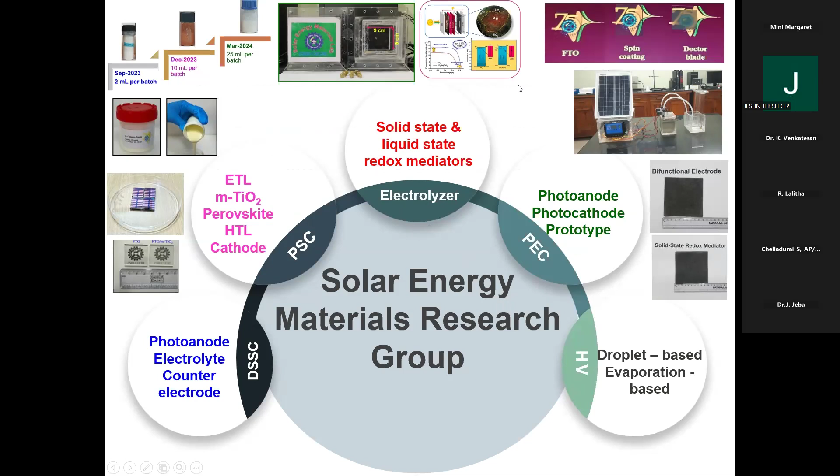In this institute, I am leading the solar energy materials research group. My group is mainly working on dye solar cells, perovskite solar cells, electrolyzers for green hydrogen production, photoelectrochemical cells, and hydrovoltaic devices. These are some of the recent developments in our research group. This is my research team; this picture was taken just in June. These are some of the distinguished alumni who completed their tenure and moved to the next position. So now let me come to the story.

So why does our government want to announce a National Green Hydrogen Mission? In 2015, there was a conference held in Paris, where the prime ministers of 195 countries participated. They seriously discussed several issues, and finally concluded that climate change mitigation is of utmost importance, because if we are unable to predict the climate, several natural disasters will happen. So they finally agreed and signed the agreement, which entered into force on 4th November 2016. This agreement covers climate change mitigation, adaptation, and financing for related activities.

Once our Prime Minister came back to India, he announced the National E-Mobility Mission, switching from fossil fuel based vehicles to e-vehicles. The e-vehicle is called a plug-in type electric vehicle. It contains a battery pack, battery management system, high voltage cables, a specially designed motor and power electronics. Just like charging your mobile phone, you can plug it in and charge it. So this is called a plug-in type electric vehicle.

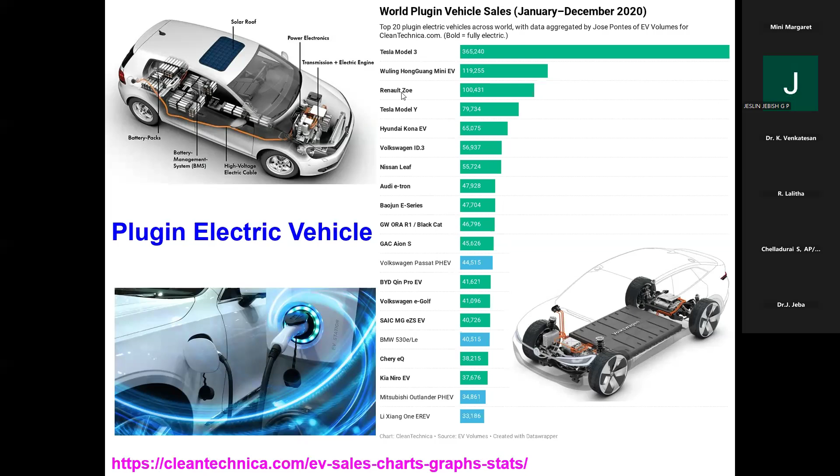Look at this survey taken between January and December 2020. Even during the pandemic period, almost 16 lakh e-vehicles were sold. E-vehicles seem to be very expensive, so alternatively, people are moving to e-scooters. In the survey taken between January and December 2021, almost 1,35,000 e-scooters were sold. So it seems both higher class and middle class people have awareness about switching from fossil fuel based mobility to e-mobility, which is a green vehicle that will not pollute the environment. That is why middle class people are also moving towards e-scooters.

The government is also setting policy for each state. They want to register at least 5 lakh e-vehicles in 5 years, and they are giving tax rebates and exemption from interest if you get a bank loan. Likewise, they are announcing several attractive schemes, since the government believes the e-vehicle is a green vehicle. But in reality, the e-vehicle is charged at a charging station, and that charge is generated from a diesel generator. So it indirectly pollutes the environment. Then how can we make a perfect mobility? That is the key question.

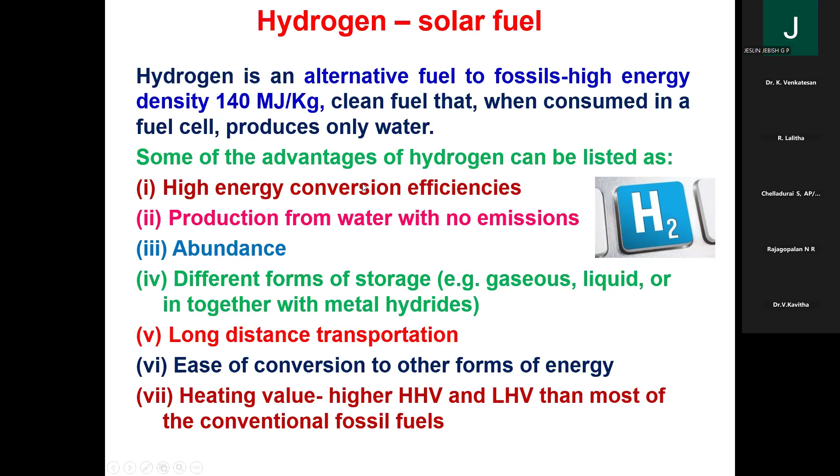Now let me explain the color code for hydrogen, because based on the production method, hydrogen has different color codes. Normally we can use renewable energy source for producing hydrogen, this is one source. Or nuclear energy, another source. Then natural gas, another source, and coal is another source. So normally hydrogen is produced by electrolysis method, steam methane reforming, and the coal gasification process.

During the coal gasification process, it will emit CO2 and produce hydrogen. This kind of hydrogen is called black hydrogen or brown hydrogen.

Suppose the emitted carbon dioxide is captured and stored, it's called blue hydrogen.

Suppose in the steam methane reforming method, if the CO2 is released, then it is called gray hydrogen.

Suppose if you are using nuclear power, you are creating nuclear waste, it is pink hydrogen.

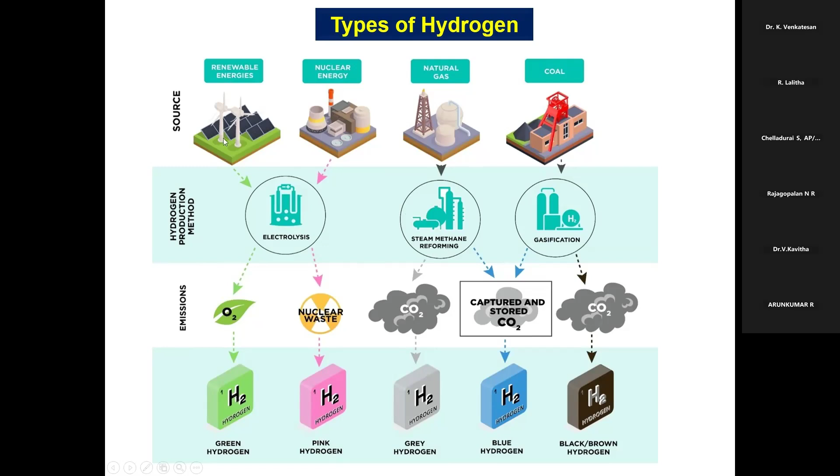Suppose if you are using renewable energy, it will release oxygen, then it is called green hydrogen. So these are the color codes for hydrogen.

So just look at this picture. This also shows an e-vehicle. This is the train running in Germany. This is the fuel cell Toyota Mirai car running in Japan. This is a zero emission bus running in the United States of America, and this is the Hyundai truck, for logistic purpose.

So I will explain how this fuel cell vehicle works and how it becomes an EV. Just look at this cross-sectional image of this particular car. Here you have the battery, then hydrogen storage tank, fuel cell stack, boost converter, power control unit, specially designed motor, and a specific membrane that will allow only oxygen from the environment.

Once you ignite the vehicle, what happens? The hydrogen from the hydrogen storage tank reaches one side of the fuel cell, oxygen from the environment reaches the other side. Both combine together in the fuel cell stack. It produces electricity, which is used to drive the vehicle. The byproduct here is water.

So just look at this, this is the working principle of this fuel cell. Once the hydrogen reaches the electrode surface it is converted into proton and releases electron. This electron is collected as electricity, and this proton combines with oxygen. So finally it releases water. Okay, so this is how it works.

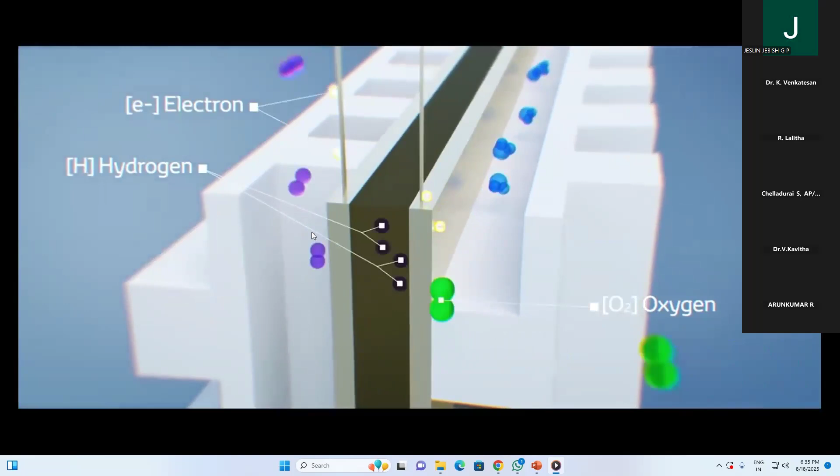Toyota. Always a better way.

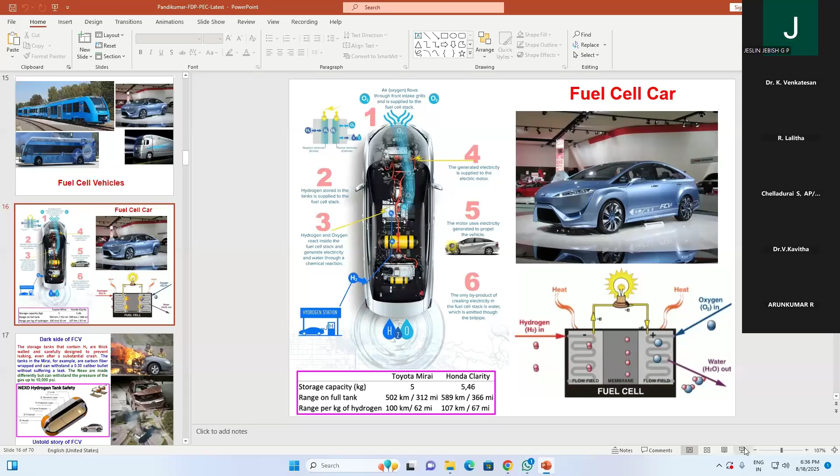Now you may be clear on the working principle of this fuel cell vehicle, right? So here we are giving the feedstock as hydrogen, then in combination with oxygen, it produces water and electricity. So water is the byproduct. This is the advantage of this particular system.

Again, as compared with the plug-in type EV vehicle, suppose you want to charge the vehicle, you have to wait for 2 to 3 hours so that you can drive 400 kilometers. But with this fuel cell vehicle, like filling petrol, you just wait 3 to 5 minutes and you can fill 5 kg of hydrogen. So that is the merit over here.

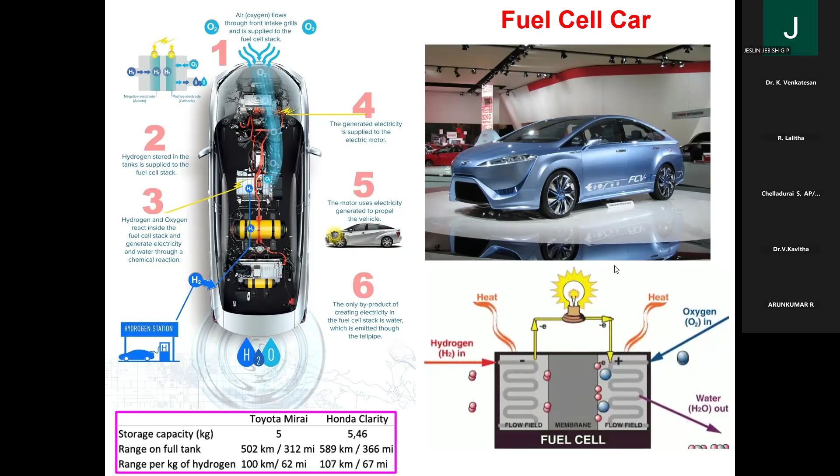But when we talk about the positive side, we have to consider the negative side too. Why? Because hydrogen is highly explosive. This is the Toyota Mirai car, it had an accident - suddenly the hydrogen storage tank exploded and immediately it caught fire. So this is one incident.

Then another incident, due to improper handling of hydrogen, a hydrogen filling station exploded in Norway. So this is another incident. So while considering the safety aspect, the Hyundai company has developed an excellent hydrogen storage tank.

So by introducing a layer by layer structure with high density polymer, plastic, carbon fiber composite, glass fiber composite, polymer foam, and flame resistant composite material coated over the surface, this will be used for storing hydrogen in the car. They have done crash tests.

This time the car got physical damage, but the hydrogen storage tank did not explode. So we have to think about the hydrogen storage aspect also - that is the important thing, because it is life threatening also.

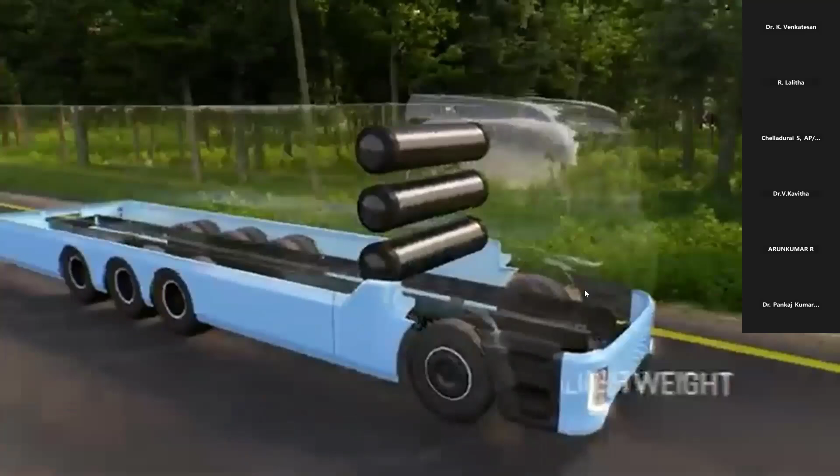The fuel delivery system on this vehicle is modified to use green hydrogen instead of diesel. A strong carbon fiber composite cylinder ensures safe storage and high pressure endurance of up to 350 bar, extremely easy to install, lightweight, and maintenance free. With minor changes to our H series 6-cylinder internal combustion engine, we are able to deliver power and torque equivalent to a conventional engine.

With a lean combustion strategy, it ensures minimal emissions and less noise, resulting in an efficient, cleaner, and quiet drive. The hydrogen internal combustion engine vehicle delivers the highest payload and long range. Its aggregates are similar to a diesel vehicle, aiding easier maintenance, all while complementing the hydrogen mission that supports the Atmanirbhar Bharat initiative. These benefits make hydrogen internal combustion engine vehicles a perfect vehicle to drive us towards the future. Ashok Leyland, koi manzil door nahi.

So this is the technology in the area of recent development in the transport sector. So now if hydrogen powered vehicles come to the market, then we have to see how much the hydrogen demand will be.

So we are in the middle of 2020 and 2030. The hydrogen demand per annum is 70 million metric tons. In the year 2030, it is expected to reach 100 million metric tons hydrogen per annum. So why? Because there are a few new corridors appearing here. In the year 2050, where we are going to achieve the net zero carbon emission goal, we need almost 540 million metric tons of hydrogen for different sectors, especially the power generation sector. So now we have to see what technology is available for green hydrogen production. That is almost urgent.

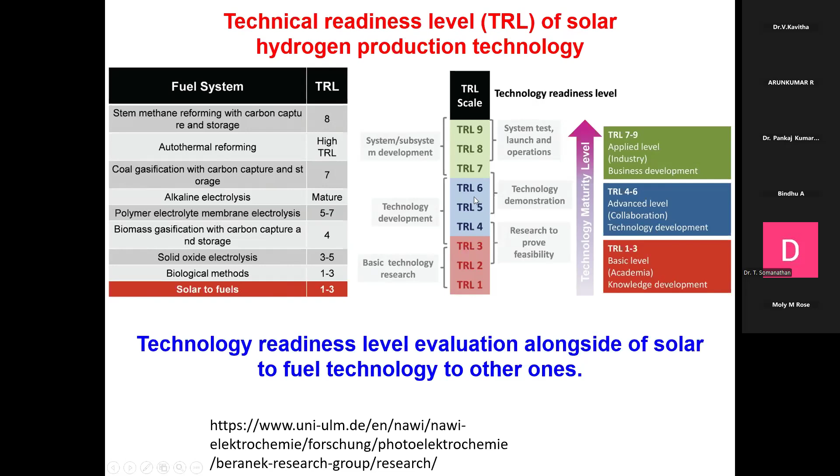Then when we talk about sunlight to hydrogen production, it is still in the infant stage. Somebody preparing the material explores hydrogen production in the presence of sunlight, and they are able to publish a paper or something - that's why they are still lacking in TRL level. We have to push this to TRL4 or TRL5. This is our ultimate aim.

So now you know the technology available for green hydrogen production. There is no defined method available for green hydrogen production in India. That's why our government announced the National Green Hydrogen Mission. The objective of this mission is to make India a global hub for green hydrogen production and export. So this is certain.

So for that, initially they allocated an 800 crore budget. Then, after knowing the importance of green hydrogen production, our Union Cabinet approved 20,000 crores for this research area and development. So these are all the expected deliverables by 2030.

That means we have to increase the green hydrogen capacity to 5 million metric tons per annum. Then we have to increase the electrolyzer capacity up to 100 gigawatts. Then, as already mentioned, green hydrogen production will be powered by renewable energy sources. Whatever renewable energy is produced, the rest of the electricity will be connected to the grid. In that way, we can increase the renewable capacity to 125 gigawatts. Okay, so these are all direct benefits.

As an indirect benefit, we can save 1 lakh crore rupees by stopping the import of crude oil. So this is one indirect benefit. Then if we start using hydrogen vehicles, we can mitigate 50 million metric tons of CO2 per annum. That is also possible. Then 6 lakh job opportunities we can create, and 8 lakh crores of corporate investment will be happening in India. So for the last two cases, I will give one typical example.

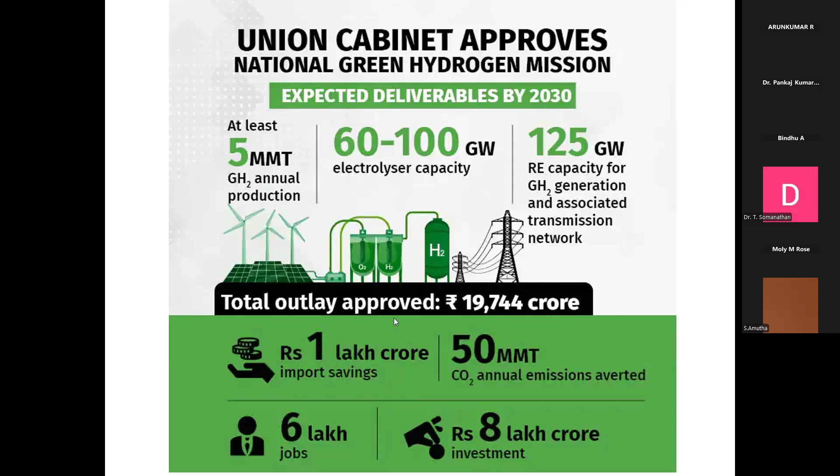There is one company, Ohmium. That is a US based company. It has two plants for green hydrogen production, one in Chengalpattu, another one in Bangalore. Okay. So last year our chief minister visited the United States of America. Then he signed an agreement with the Ohmium company to set up a new factory in Chengalpattu. For that, they are going to invest 400 crores, which has the capability of producing 500 job opportunities. So this is one typical example.

So likewise, many have to come to India. This picture was taken during the signing of the agreement. Okay, so he is Chokkalingam. Chokkalingam is the chief technical and scientific officer for this company. He is an alumnus of our institute. He completed his undergraduate BTech in chemical and electrochemical engineering. Then later he completed his PhD in the US. Then he joined this company and worked for 15 years. Now he has become the chief technical and scientific officer.

Okay, so now let me come to the original story. How can we produce hydrogen from sunlight? You just take a semiconductor, put it into water, then expose it to sunlight, and it will produce hydrogen and oxygen. The simple equation involves two reactions, the hydrogen and oxygen evolution reactions. One is two proton, two electron; the other is four proton, four electron. This four proton, four electron process is called the rate determining step. And looking at the overall reaction, to split water you need 1.23 volts theoretically.

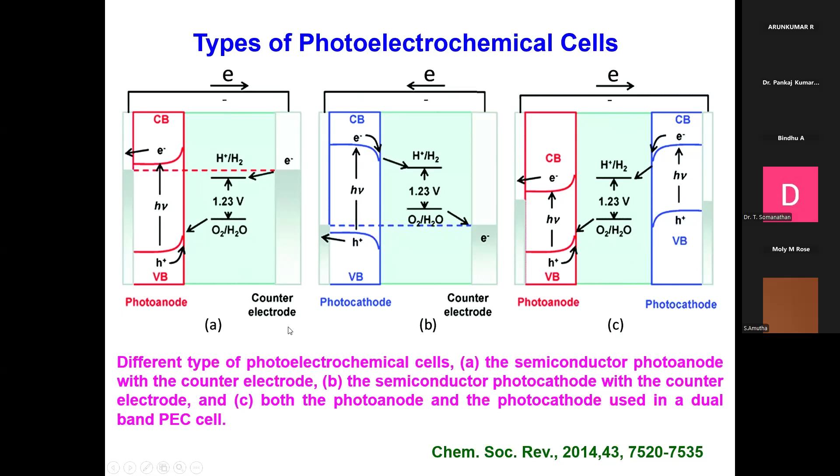Okay, but when we go with photoelectrochemical water splitting, these are the types of photoelectrochemical cells. One is a photoanode. The n type electrode is always called a photoanode. When we use a p type semiconductor, it is called a photocathode. If you have both, you can form a tandem cell. So these are the different types of photoelectrochemical cell.

This photoelectrochemical cell was developed by Honda and Fujishima in the year 1972. They developed this photoelectrochemical cell, which consists of two compartments containing the anode and the cathode. Both are connected through the circuit, and upon illumination, it oxidizes the water and releases oxygen and protons. The protons move through the proton exchange membrane, accept electrons here, and are reduced to form hydrogen. So here you can separately collect hydrogen and oxygen.

So if you want to start your career in photoelectrocatalytic water splitting, you have to consider these 4 points. One is suitable optical properties, another is suitable band edge alignment, the others are charge separation and transport, and stability against light irradiation. These are the important aspects you have to consider for photoelectrochemical water splitting.

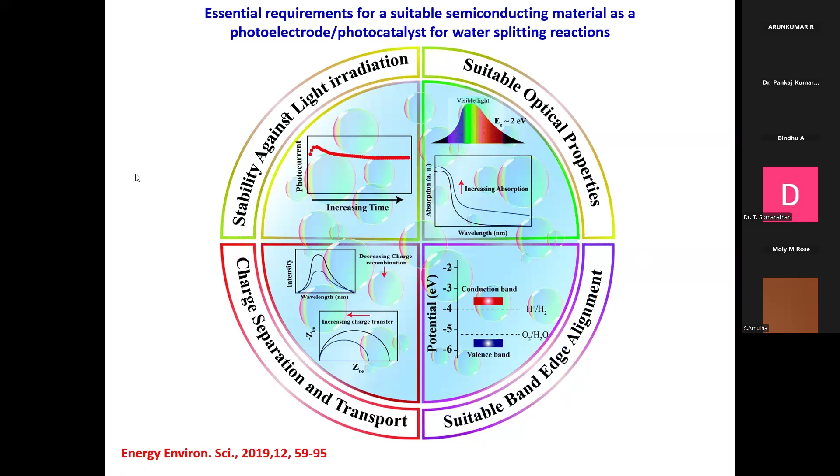So we have several materials that will be used for water splitting applications, especially our interest, bismuth-based materials. Why? Because they have four different components: single component, binary, ternary, and layered structures. So why our interest in bismuth-based materials?

Because when we look at the valence band position, the valence band positions of bismuth-based materials are more positive than the oxygen evolution potential. As already mentioned, the oxygen evolution is the rate-determining step. So if we make the oxygen evolution reaction kinetics more facile, then we can enhance the hydrogen production rate. So this is our interest.

But whenever we take a simple semiconductor, it suffers from charge recombination and poor charge transfer properties. To overcome this limitation, people can adopt component adjustment, surface modification, morphology control, and heterojunction formation. Our approach is the formation of a heterojunction.

Why? Just look at this picture: a person is jumping from the ground, then he reaches the ground again due to earth's gravity. Likewise, if you take a single semiconductor, upon illumination it will undergo a charge transfer process, but due to the Coulombic force it will undergo charge recombination. The electrons and holes will recombine, and finally the net result will be zero.

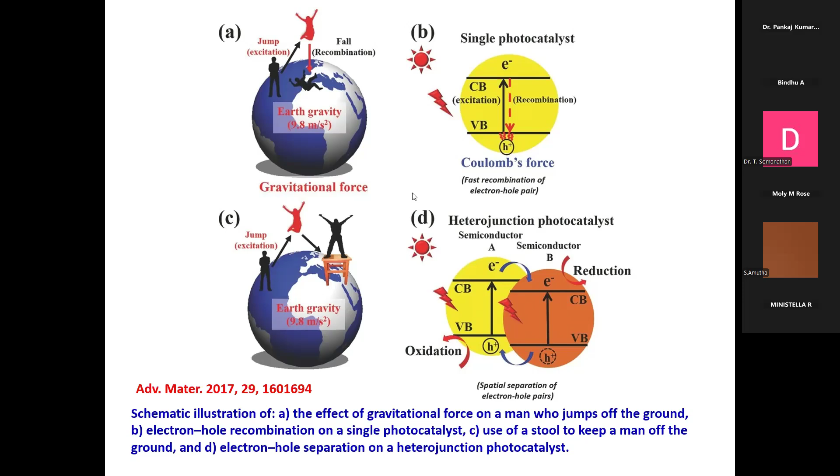So again, heterojunctions have three different types: the straddling gap heterojunction, the staggered gap type 2 heterojunction, and the broken gap heterojunction. In the type 1 heterojunction, both oxidation and reduction take place in the secondary semiconductor. But in the type 2 heterojunction, reduction and oxidation take place in opposite directions. The broken gap one is only predicted, so it is not used for any application purpose.

So here in type 2, the electrons will step down and the holes will step up. But here both the electrons and the holes will step up.

Other than that, if we have a p-type semiconductor and an n-type semiconductor, we can combine them to form a p-n heterojunction. When combined, at the interface of both materials an internal electric field develops in the space charge region. The electrons move towards the n-type semiconductor and holes move towards the p-type semiconductor. So this also behaves like a type 2 semiconductor.

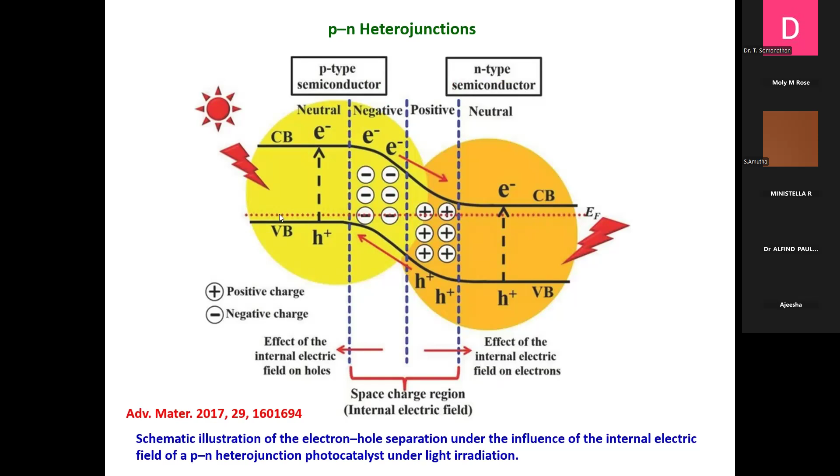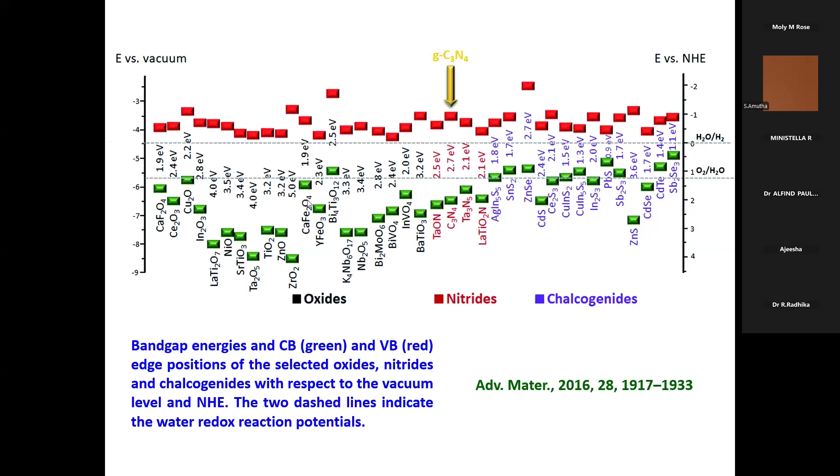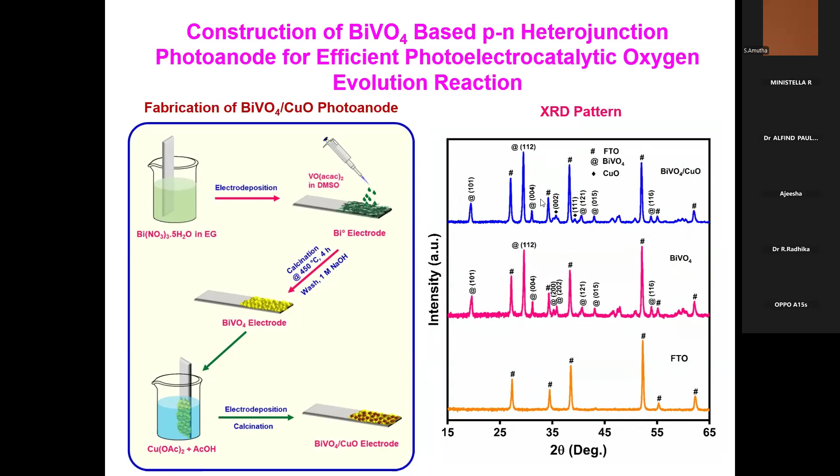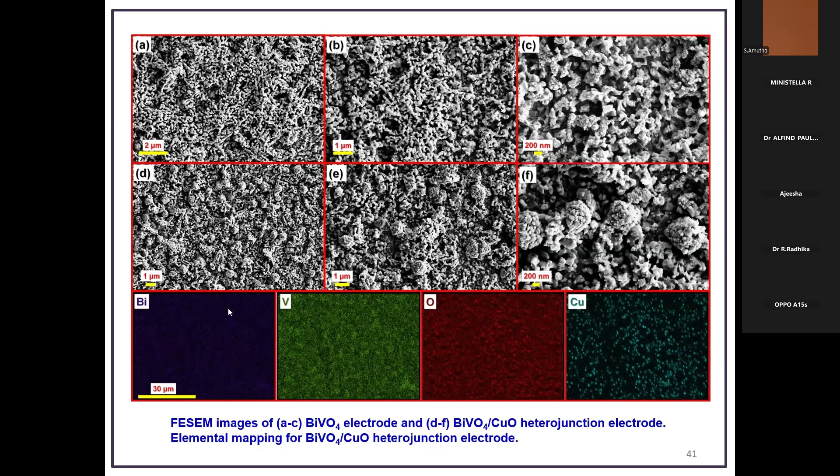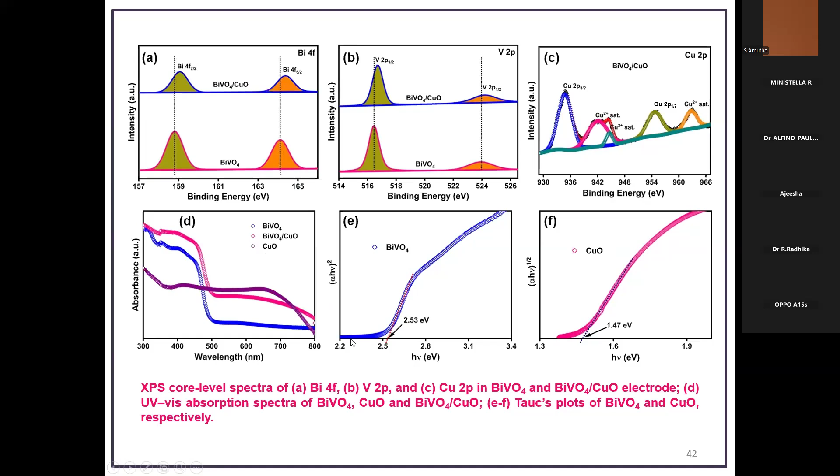This XPS analysis shows that before and after making the heterojunction, there is a shift in the binding energy for both the core levels. That reveals the successful formation of a heterojunction between the two interfaces. Then after forming the heterojunction, the visible light absorption got enhanced. We have calculated the band gap using the Tauc plot method for bismuth vanadate and copper oxide as 2.5 electron volt and 1.47 electron volt.

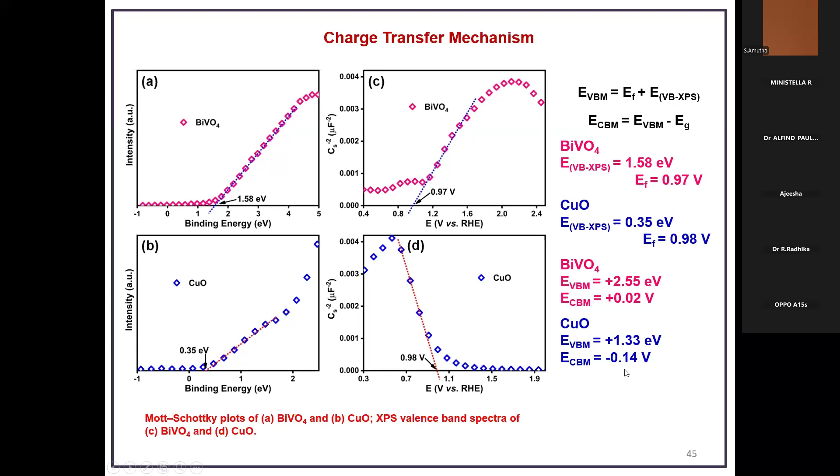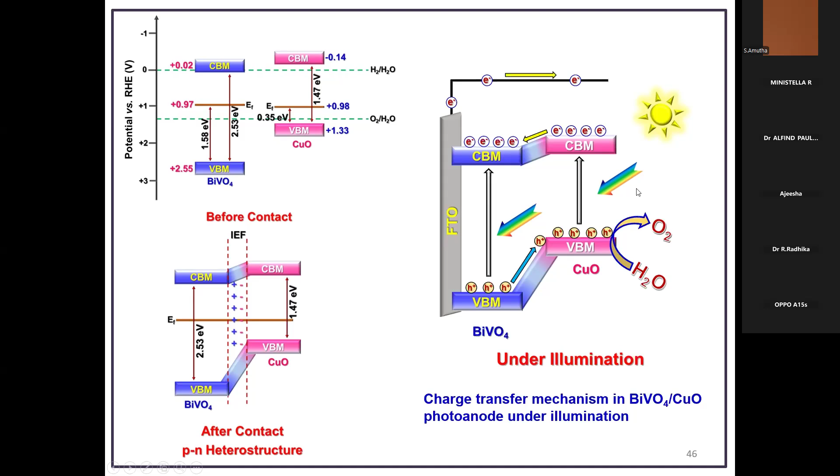We have also checked the stability. It shows good material stability. For durability, it is able to constantly produce hydrogen. Then we calculated the efficiency. It is almost close to the benchmark value of 0.3 percent.

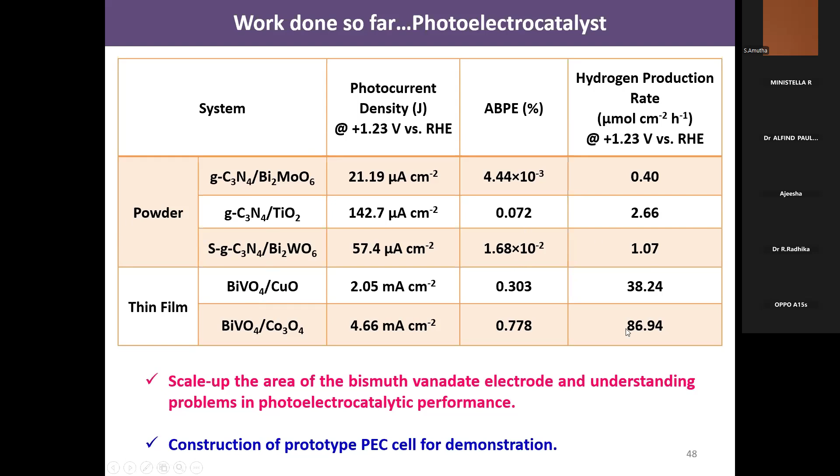We have done several works with powder photoelectrocatalysts, especially powder-based systems produced through the hydrothermal method, and then the thin film approach for making the device. We compared the hydrogen production rate and the efficiency of the systems. The powder-processed method shows a poor hydrogen production rate and poor efficiency. But once we make it in thin film form, it shows a high hydrogen production rate. So we have taken this thin film approach for making the prototype device.

The results I have discussed until the last slide come under TRL3. I want to go beyond TRL3. For that, the best performing electrode is the bismuth vanadate electrode. I have done the electrodeposition by scaling up from lab scale 1 centimeter square to 25 centimeter square. The results you have seen in the previous slides were done with the 1 centimeter square electrode. Now we have scaled up the electrode from 1 centimeter square to 25 centimeter square.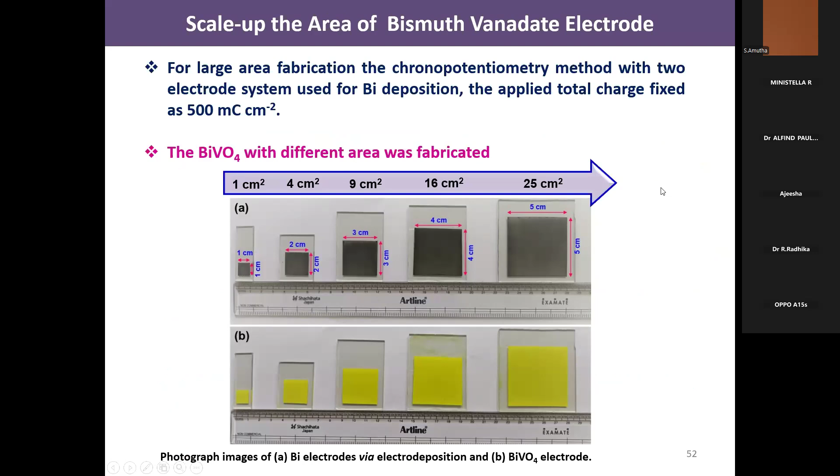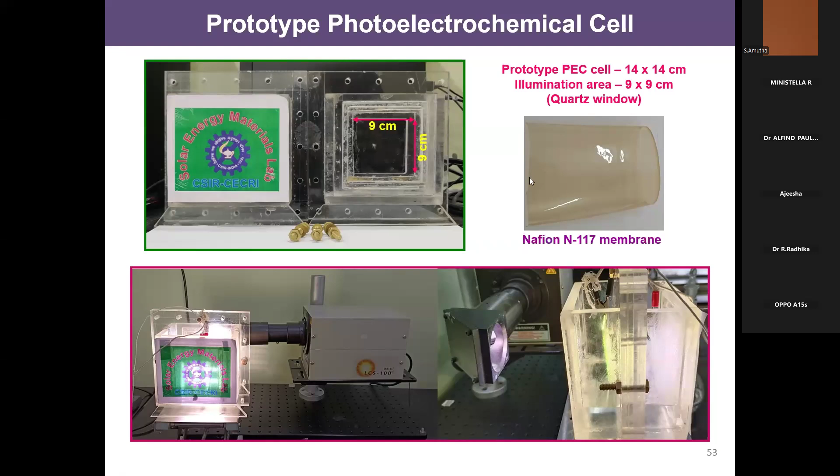Then we developed this prototype photoelectrochemical cell. It is made with a quartz window and acrylic material. We are using a Nafion membrane as the proton exchange membrane. Then we performed the photoelectrochemical water splitting.

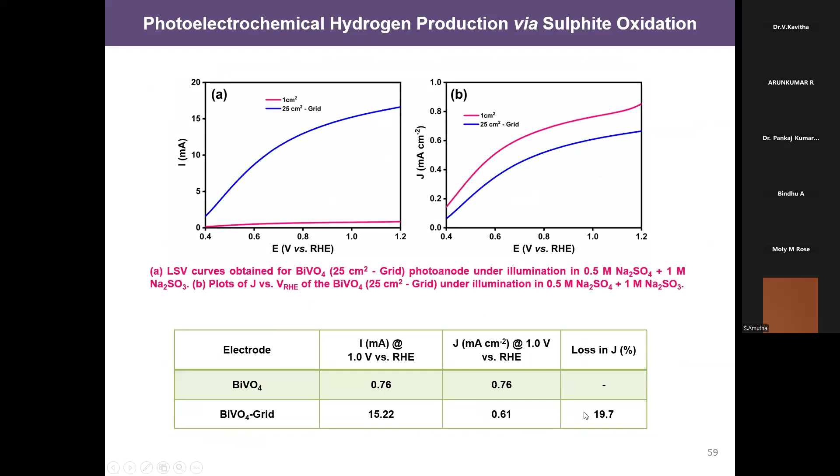So here it seems like we have reduced the efficiency loss from 51 percentage to 27.6 percentage. Further, we added the sacrificial agent. Then we reduced it to below 20 percentage. Then we checked the hydrogen production rate. So we are able to get 227 micromoles per hour per centimeter square. The stability also shows excellent. So this is what we have developed.

So this is the overall summary of the presentation. Initially we discussed the importance of hydrogen production, then the photoelectrochemical cells for hydrogen production and its types, the materials used for photoelectrochemical water splitting, the types of heterojunctions, and some of the materials developed in my lab and their performance for hydrogen production. Finally, I have shown the prototype device development and its performance.

So for this particular prototype development and beyond the lab scale device development, my student got the best PhD thesis award from CECRI here. These are the publications related to the journey from lab scale to prototype development. This is an edited book which shows the fundamental information about heterojunctions in the material aspect. I have been recognized for the contribution to solar energy conversion by the Academy of Science, which offered me the Young Scientist Award 2023.

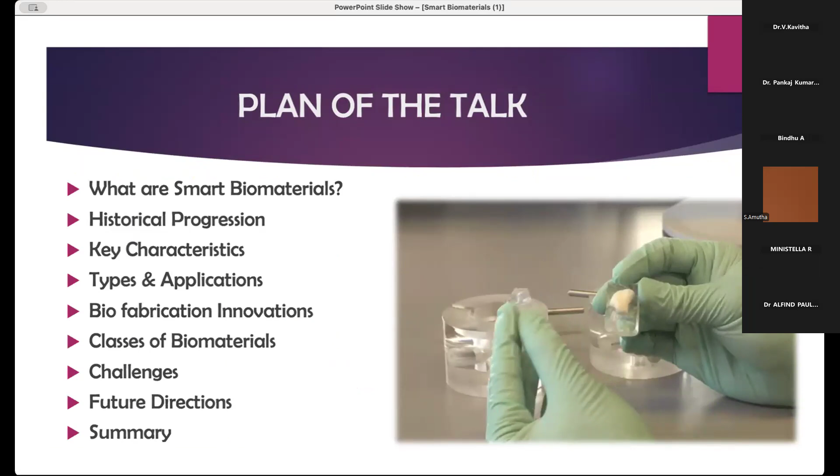What are smart biomaterials? These biomaterials are actually nanostructured materials which contribute to the fabrication of diagnostic devices for various medical applications. These smart biomaterials are an emerging class of materials that can respond to external stimuli with large discontinuous changes in their properties. And they have been designed to act as an on and off switch.

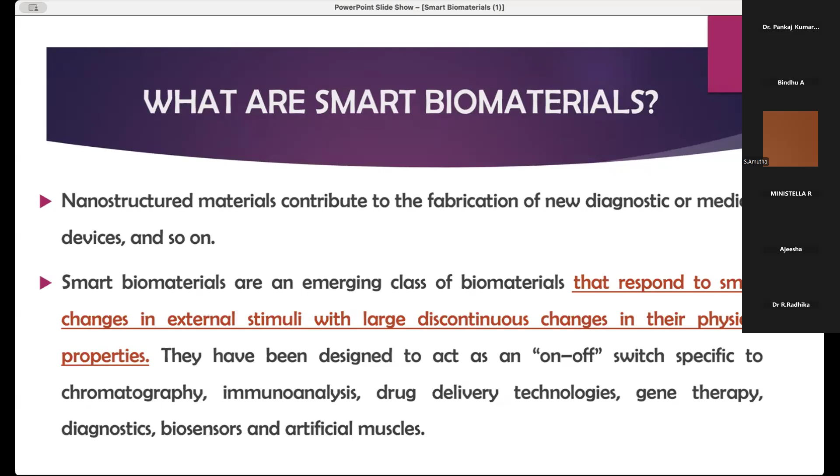It could act as an alternative for various mechanisms and techniques: chromatography, immunoanalysis, drug delivery technologies, gene therapy, drug diagnostics, biosensors, and artificial muscles. So these smart biomaterials are very significant in all biomedical field applications.

Now coming to the historical evolution of smart materials. Historically, early biomaterials include gold, iron, brass, glass, wood, and bone. Gold is malleable, an inert metal, does not oxidize, and finds a lot of application in dentistry. Iron and brass show high strength and could be used to rejoin the fractured femur.

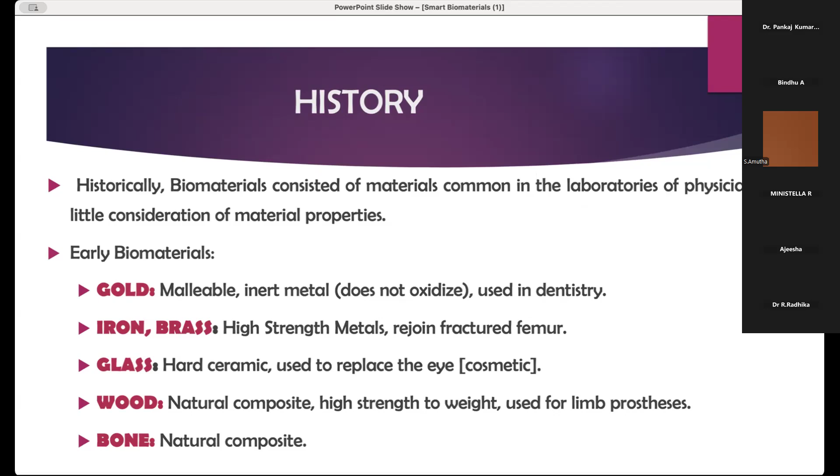Then glass, which is a very common active biomaterial, a hard ceramic, is used to replace the eye. Wood is a natural composite with high strength to weight, and could be used for limb prostheses. And bone can act as a natural composite due to its excellent biocompatibility. So as we have seen their history, now we move on to the evolution of smart biomaterials.

As I said earlier, smart biomaterials are classified into 3 different generations: since the 1950s, since the 1980s, and since 2000 onwards. They aim to achieve bioinertness, bioactivity, and in recent days they are used as regenerative functional tissue because of their high mechanical strength and biocompatibility. Now let me discuss the 3 types of biomaterials classified under first, second, and third generation.

The first generation biomaterials are called ad hoc implants. They were specified by physicians using common and borrowed materials, and the requirement was to find a suitable physical property to match those of the replaced tissues with a minimal toxic response to the host. They are biologically inert or nearly inert materials used to reduce corrosion and minimize the immune and foreign body response. So they are called bioinert materials.

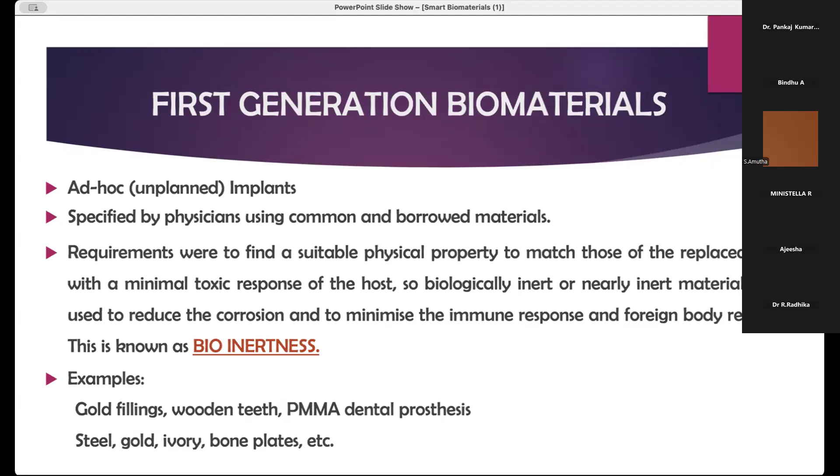Few examples include gold fillings, wooden teeth, polymethyl methacrylate dental prostheses for artificial teeth, implants, steel, gold, ivory, and bone plates, etc. So these are the first generation biomaterials.

As we move on to the second generation biomaterials, these show high bioactivity. The first generation biomaterials were effective on inertness; now we move to the second level of bioactivity. These biomaterials are engineered implants using common and borrowed materials with biopolymer composites, developed through collaborations of physicians with engineers. The characteristic feature of second generation biomaterials is bioactivity.

A bioactive material is one that elicits a specific biological response at the interface of the material, which results in the formation of a bond between the tissue and the material. Few examples include heart valves and pacemakers.

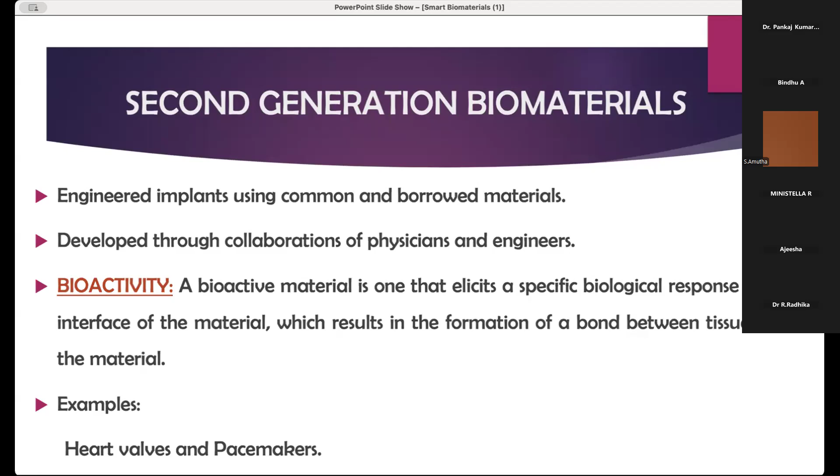Now coming to the third generation biomaterials; we are living in the era of third generation biomaterials. This generation introduces the idea of regenerative medicine and personalized medicine. These biomaterials are capable of stimulating one or more functions of the cells forming the basis of tissue, muscle, or cartilage through proper signaling, to encourage the regeneration of these tissues.

Few examples include cell matrices for three-dimensional growth and tissue reconstruction, which is the recent advancement in the medical field as personalized medicine.

The third generation biomaterials are recently used in organ implants and other biomedical field applications. Tissue engineering involves the use of molecular and cell biology technology, combined with the advantages of material science and processing, to produce tissue regeneration in situations where the patient's cells cannot regenerate over time.

So we have studied about the history and evolution of biomaterials. The third generation biomaterials are highly advantageous compared to the first and second generation biomaterials.

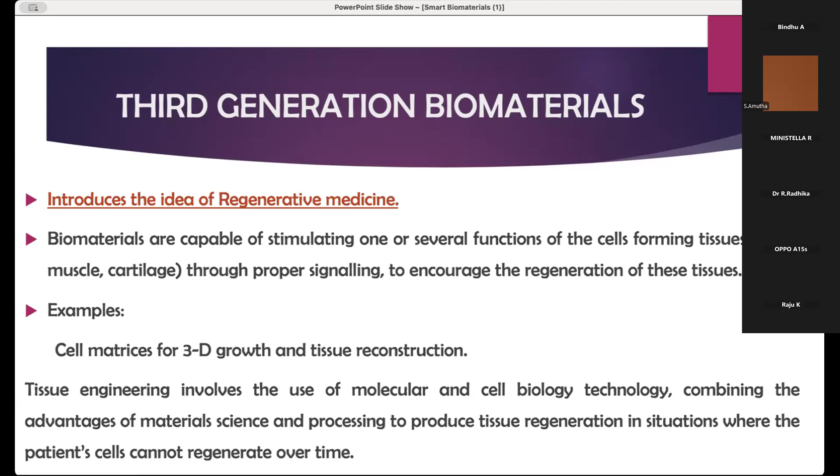Now coming to the classification of biomaterials. Synthetic biomaterials are classified into 4 different categories, namely metals, semiconductor materials, ceramics, and polymers.

Metals are usually found in applications like orthopedic screws and dental implants. Semiconductor materials could be used for implantable microelectrodes and biosensors. Materials with high thermal stability are ceramics, which could be used for dental implants and bone replacements. Polymers are very good in drug delivery devices, skin, cartilage, and ocular implants. These are the major classes of synthetic biomaterials which find a lot of applications.

So how do smart biomaterials respond towards external stimuli? Usually these biomaterials show effective property response to external stimuli like physical stimuli, chemical stimuli, and biological stimuli. This material shows improved properties and finds a lot of application in tissue engineering, immunoengineering, and drug delivery applications.

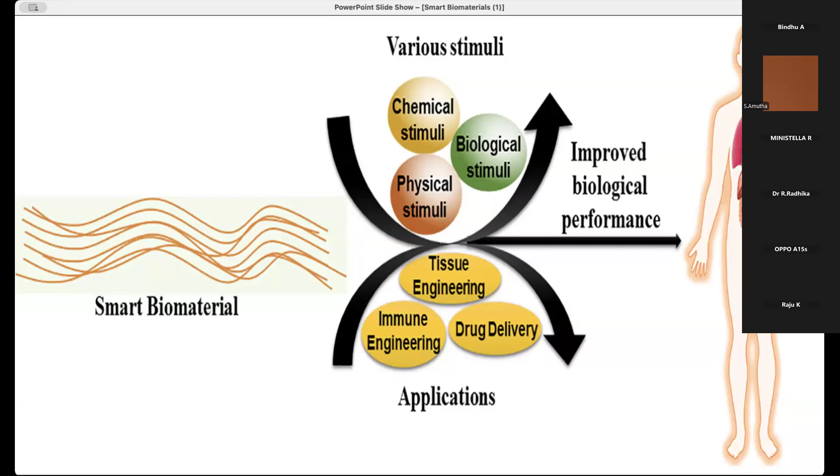So all smart materials are effective on external stimuli for physical stimuli, chemical stimuli, and biological stimuli.

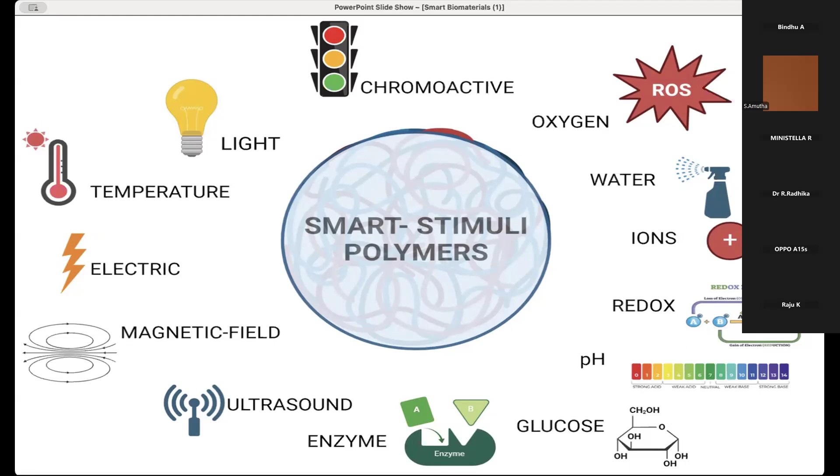Now coming to the key characteristics of smart biomaterials. These smart biomaterials possess several properties which are very unique for their biomedical applications. Here I have included a few which are very basic and responsive: responsiveness, biocompatibility, biodegradability, and tunable properties.

What is responsiveness of smart biomaterials? As we discussed earlier, they are responsive towards specific stimuli, either physical, chemical, or biological stimuli, and they could interact with biological systems in a controlled manner. That is why they are preferred for responsiveness activity, since they can easily adapt with living tissues.

Then biocompatibility - these smart biomaterials should be biocompatible because they should not cause any harmful effect to living tissues or cells. Then biodegradability - these materials should be able to degrade over time through enzymatic or hydrolytic processes to avoid accumulation in the body, reducing harmfulness.

Then tunable properties - these biomaterials are preferred because of their specific tunable properties like stiffness, porosity, and surface geometry with specific chemistry, which can be tuned for various applications.

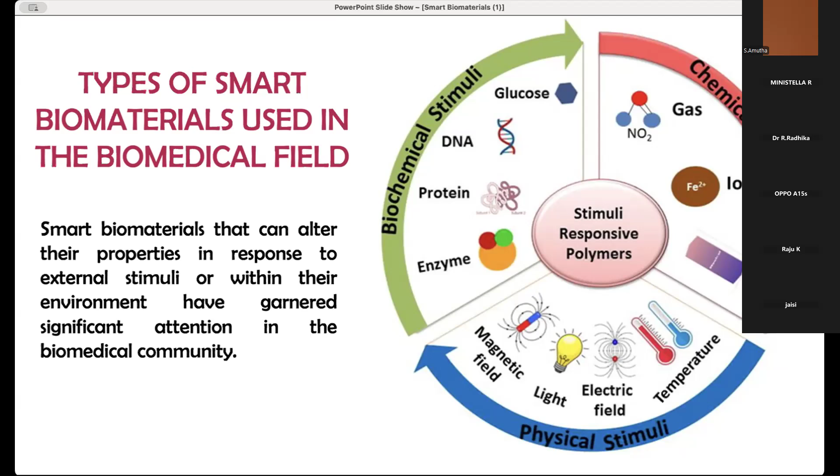Coming to biochemical stimuli, smart biomaterials show extensive response in reaction towards glucose molecules, DNA, protein, and enzymatic reactions. It is also studied with respect to physical stimuli changes such as magnetic field, light, electric field, and temperature, along with chemical stimuli responsiveness to gas, ion, and enzymatic reactions.

Now moving on to the types of smart biomaterials. Again, giving importance to their responsiveness on stimuli - physical stimuli and chemical stimuli. Temperature sensitive, light sensitive, and magnetic field sensitivity could be studied under physical stimuli responsiveness. Then they are pH sensitive for drug delivery applications. Enzymatic responsive and ion responsive could be studied under chemical stimuli responsiveness of smart biomaterials.

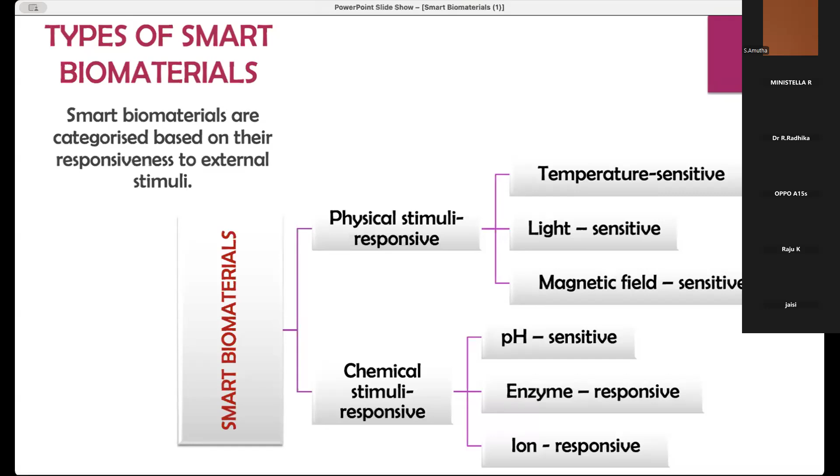Now we are moving on to the discussion on physical stimuli responsive biomaterials.

How do smart biomaterials respond to temperature variation? Examples include thermoresponsive hydrogels, which either contract or swell in response to changes in temperature. This can be used for controlled drug release, or in temperature variation, for implants. We can study the drug loading efficiency, releasing efficiency, and encapsulation efficiency of the nanocarriers along with the drug molecules.

Then light sensitive materials that respond to light exposure are often utilized for triggering the release of drugs and activating cellular processes.

Magnetic field sensitive biomaterials that can be guided or manipulated by a magnetic field are useful for targeted drug delivery in cancer therapy, magnetic resonance imaging like MRI studies, or hyperthermia treatment used in cancer patients.

Now coming to chemical stimuli responsive biomaterials. These materials are sensitive towards pH, enzyme, and ion concentration.

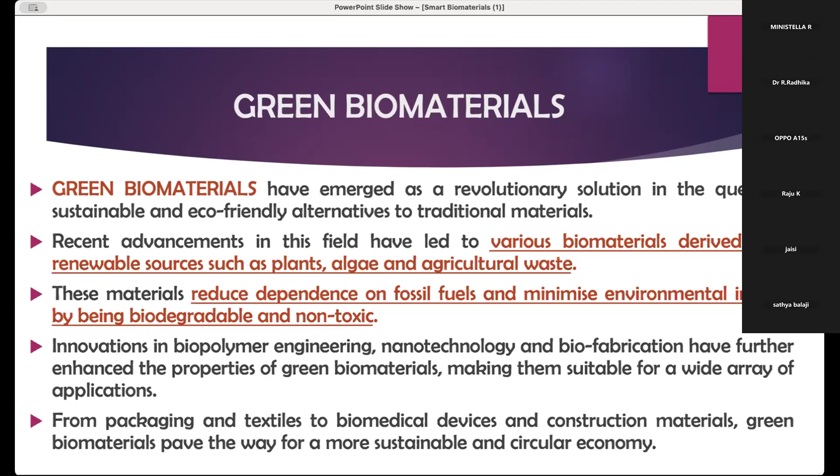Innovations in biopolymer engineering, nanotechnology, and biofabrication techniques enhance the properties of green biomaterials, making them suitable for various biomedical applications. From packaging and textiles to biomedical devices and construction materials, green biomaterials have paved the way for a more sustainable and circular economy.

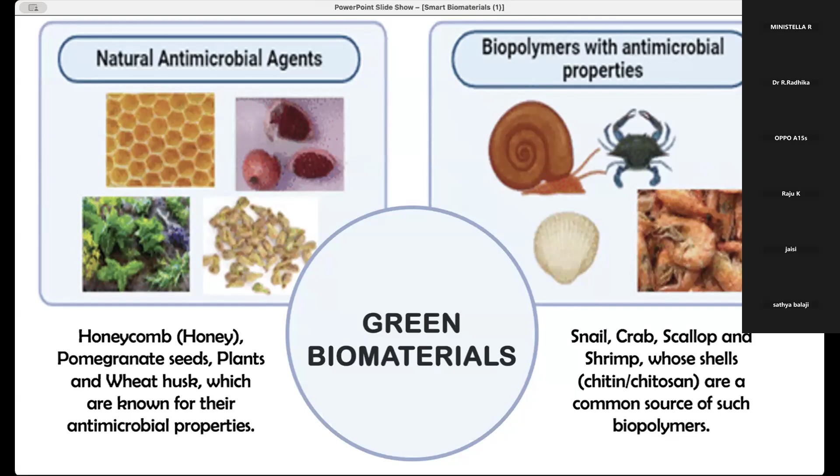Then coming to biopolymers, there are materials with shells like chitin and chitosan. These are considered a common source of biopolymers, such as crab and snail shells, which could be used for their effectiveness in antimicrobial property.

What are the potential applications of smart biomaterials? As we discussed earlier, they are effectively used in drug delivery vehicles, tissue engineering, biosensors, and medical devices.

Drug delivery system: drugs play a pivotal role in alleviating illness and improving the well-being of humans, extending lifespan for both humans and animals. A drug delivery system describes a technology that carries a drug using nanomaterials as a drug carrier, enabling effective treatment throughout the body.

What are drug delivery devices? These are specialized equipment designed to circulate therapeutic substances to patients in a precise and controlled manner. They can take various forms, including drug-loaded nanoparticles, liposomes, micelles, implantable devices, and transdermal patches.

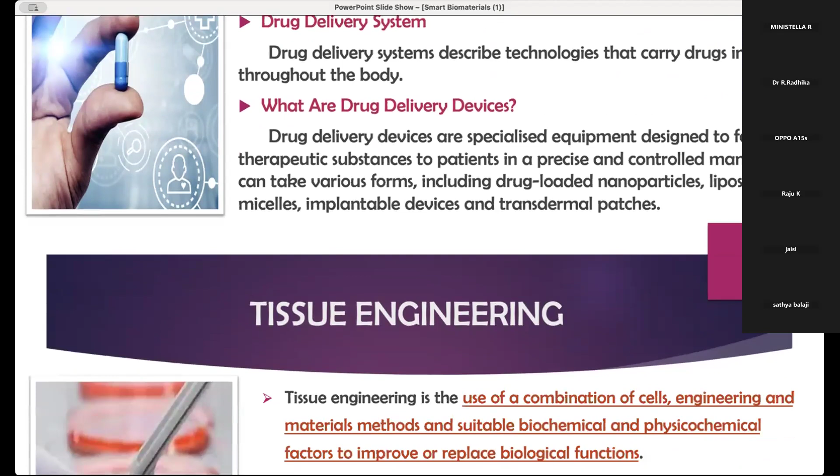Tissue engineering is another area where smart biomaterials play a vital role. It is the use of a combination of cells, engineering, and materials methods suitable with biochemical and physicochemical factors to improve or replace the biological functions of tissues.

The term has also been applied to efforts to perform efficient biochemical functions using cells within artificial systems, such as an artificial pancreas or bioartificial liver production.

Tissue engineering covers a broad range of applications where the term has been used to represent efforts to repair or replace structural tissues like bone, cartilage, blood vessels, and bladder, using smart biomaterials due to their key characteristics of biocompatibility and effective responsiveness.

Why are smart materials preferred for medical diagnostic devices? The simplest one is the biosensor. There are different types of biosensors.

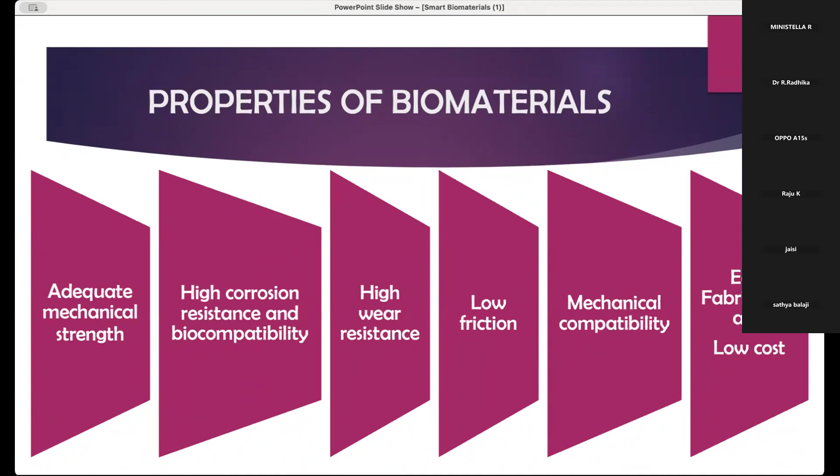There are different types of biosensors available, used both as diagnostic as well as therapeutic devices. Properties of biomaterials include adequate mechanical strength, high corrosion resistance and biocompatibility, high wear resistance, low friction, mechanical compatibility, and so on.

Coming to the surface properties of biomaterials, these surfaces can be comprised of different geometry and chemistries, with atomic, supramolecular, and macromolecular geometry. The surfaces may be structurally or compositionally inhomogeneous with phase-separated domains or micro-contact printed lanes, which are more specific for application. The surfaces may be inhomogeneous with depth into the specimen, or could be overlaid with a thin film.

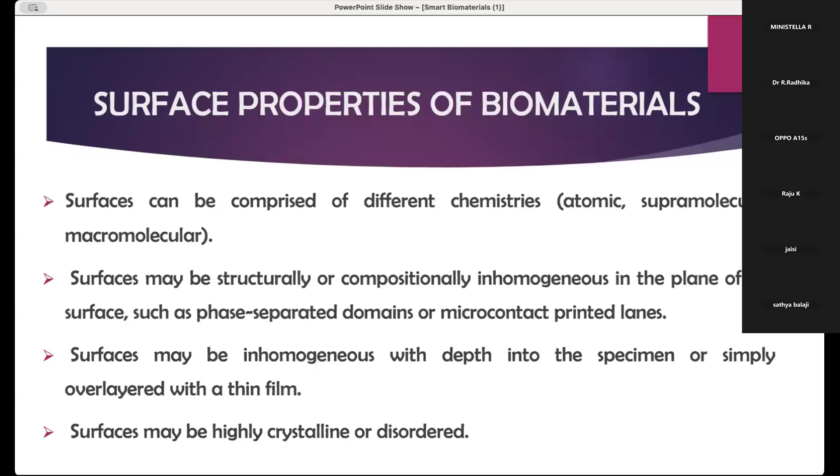The surfaces can be either highly crystalline or disordered, depending on the particular application. We study their surface properties, which are more specific for their requirement. Now coming to the mechanical properties of biomaterials: elastic modulus, hardness, fracture toughness, fracture strength, and improvement.

Coming to elastic modulus, the smart biomaterial measures stiffness, that is the ratio of stress to strain, and it must match the natural tissue to avoid implant failure. This biomaterial shows extensive elastic modulus, which is very important for movement.

It is tested via nano indentation and laser ultrasonics to study the elastic modulus of the material. Then coming to hardness studies, it shows the resistance to wear and deformation, crucial for abrasion resistance in implants, tested using micro and nano indentation methods.

Coming to fracture toughness studies, it prevents crack propagation, vital for clinical reliability, enhanced with additives like zirconia. It also shows high fracture strength, maximum stress before breaking, which is very useful for brittle materials to avoid flaw control, influenced by porosity and flaw size. Improvements could be done on ceramic materials through crystallization and reinforcements in order to achieve strong, biocompatible, durable biomaterials for various surgical applications.

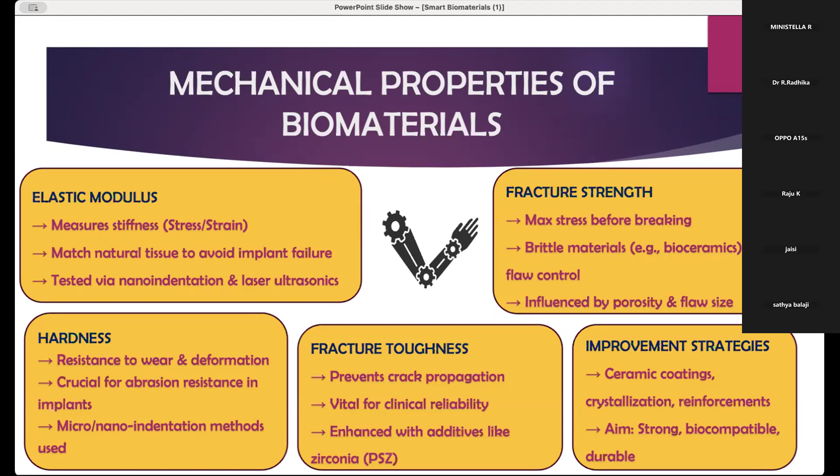Now let us move on to the thermal properties of biomaterials. These can have a significant effect on the performance of the material with regard to implantation and interfacing with biological tissues. Thermal properties are essential to evaluate the thermal behavior of the solid, which consists of heat capacity, thermal expansion, thermal conductivity, thermal stability, specific heat, melting point, and thermal shock resistance.

Thermal property refers to the response of the material to the application of heat, as a solid absorbs energy in the form of heat and its temperature rises with an increase in specific dimensions, which could be used for implantation and interfacing with biological tissues with biocompatibility.

Now coming to the optical properties of biomaterials. These determine how biomaterials interact with light, which is very important in biomedical applications—how these materials absorb light, and how light could be transmitted through the material, useful for wound healing, like chronic wound healing as shown in the figure with an LED matrix.

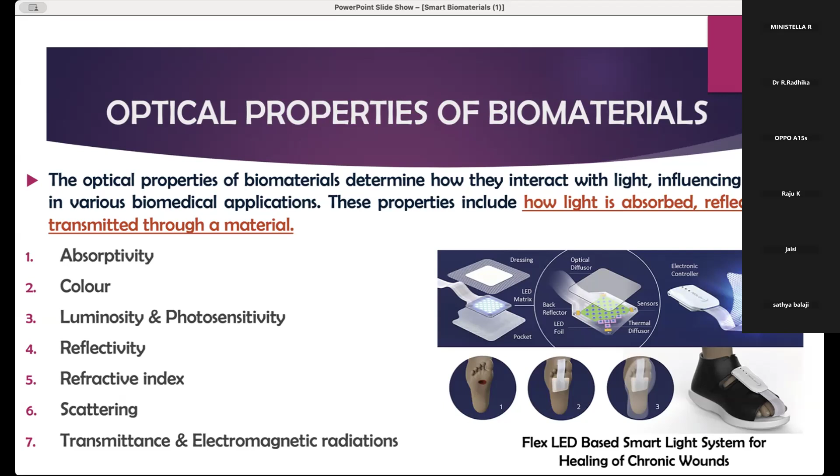It is used with a reflector, thermal diffuser, biosensor, and optical diffuser. This smart material could be used as patches to heal chronic wounds due to their extensive properties of absorptivity, color, luminosity, photosensitivity, reflectivity, refractive index, scattering, transmission, and electromagnetic radiation response, which make these biomaterials effective as patches to heal chronic wounds.

Electrical properties of the biomaterials. So the biomaterials can permit or resist the flow of electricity by employing the electric property of the material. Biomaterials with electrical properties such as conductive, piezoelectric, or dielectric are utilized in tissue regeneration, energy storage, and biosensing for healing, energy capture, and signal detection.

They show their high response on resistivity, conductivity, dielectric strength, thermoelectricity, and temperature coefficient of resistance. These properties make this biomaterial effective on electric property. Then moving on to the magnetic property of the biomaterials. Magnetism also has a strong role to play in their bio applications.

Magnetic properties change dramatically with respect to the particle size beyond a critical limit or critical size, which can make them work in the single domain and multidomain regions. So below the critical size, it shows superparamagnetic properties. This makes the smart biomaterials usable extensively for magnetic bioseparation, MRI contrast agents, and for other bio

applications like bioseparation. The superparamagnetic materials are considered to be superior to ferro and ferrimagnetic particles due to their absence of remanence in the magnetic field. Since a magnetic material exhibits the magnetic properties extensively only in the presence of a magnetic field, in bioseparation they could be removed from suspension by applying the magnetic field.

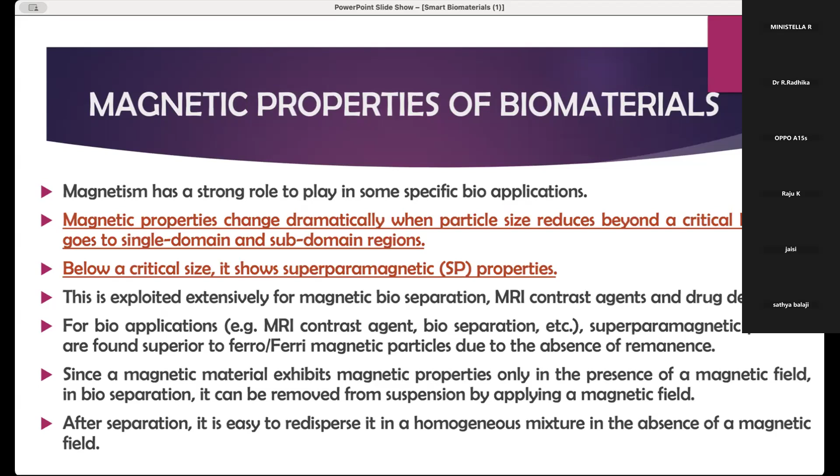So after separation, it is easy to redisperse them in the homogeneous mixture in the absence of magnetic field, which is important in hyperthermia treatment for cancer patients. So now we are moving on to the special case of the biomaterials, the metallic biomaterials and magnetic biomaterials. So the metallic biomaterials are the most dominant group of the materials.

They are highly used for implantation of tissues or organs. They are engineered systems developed to provide internal support to the biological tissues. They are used largely in joint replacements like artificial joints, for bone plates and screws, then for dental implants for artificial teeth, then stents and orthopedic fixation.

So the metallic biomaterials show high strength. That's why they are preferred in various applications. In addition, they are also used in cardiovascular devices like artificial heart valves and other major components of heart assist devices like vascular stents and neurovascular devices, and that has gained various attention from physicians.

The good electrical conductivity of metal favors their use in the neuromuscular stimulation, and the most commonly used example is in cardiac pacemakers. Metallic biomaterials may be employed not just as a replacement for failed hard tissue, but they are also used in the reconstruction of soft tissue such as blood vessels.

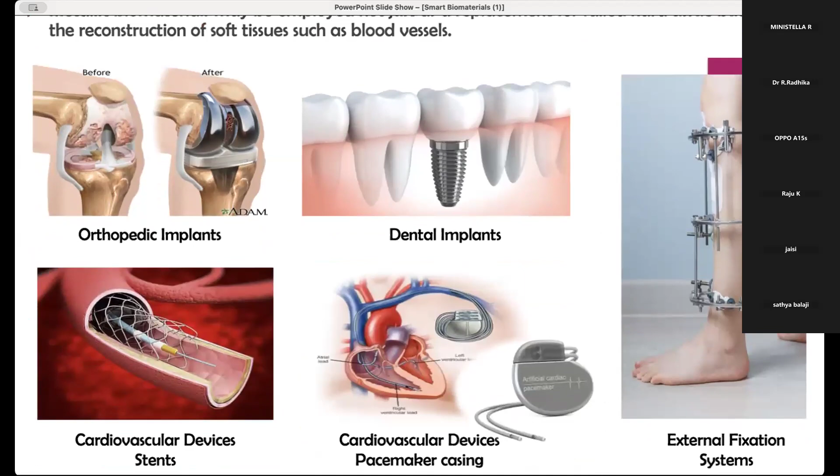So this figure actually shows how these metallic biomaterials could act as orthopedic implants, before and after surgery, how they have been acting for their biocompatibility and their effective responsiveness towards organ acceptance, then for dental implants, for artificial teeth, then for cardiovascular devices as stents, then cardiovascular devices as a pacemaker casing, then external fixation systems. So the metallic smart materials are preferred in these vital applications by physicians.

Then moving on to the next important class of smart biomaterials, the magnetic biomaterials. So the magnetic biomaterials are materials that possess magnetic properties, and they are extensively designed to interact very safely and effectively with biological systems, with the cell, tissue, and so on. So they are often composed of magnetic nanoparticles such as magnetite or maghemite. Sometimes they are embedded in biopolymers or hydrogels.

These magnetic biomaterials are actually superparamagnetic because they carry the magnetism only in the presence of the magnetic field, and they don't have the capacity to retain it. So these magnetic biomaterials are very safe and secure for usage in the human body. So these magnetic biomaterials can respond to the external magnetic field, which is very useful for targeted drug delivery, MRI imaging, cancer therapy, that is hyperthermia treatment, and for tissue engineering.

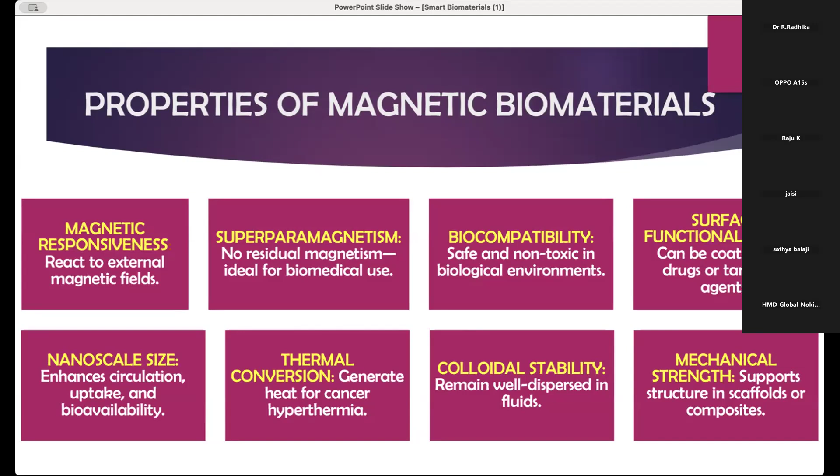They can generate heat for cancer hyperthermia, which is very important to cure or to remove the damaged cells. Then for colloidal stability, they can remain well dispersed in fluids, then structure as a scaffold in composites. So this figure shows some of the major advantages

So now let me move on to the major aspect of these smart materials: biofabrication techniques of smart biomaterials. What is biofabrication? Biofabrication is an emerging technology which encompasses a diverse range of physical, chemical, biological, and engineering methodologies to assemble biologically derived components, leading to the development of models, devices, systems, and products with broad applications.

As we integrate smart materials into the biofabrication process, it makes it possible to enhance their functionality and enable them to be utilized in various fields such as tissue engineering and regenerative medicine, personalized medicine, drug screening and pharmaceutical development, biosensors and bioanalysis, synthetic biology, and biocatalysis.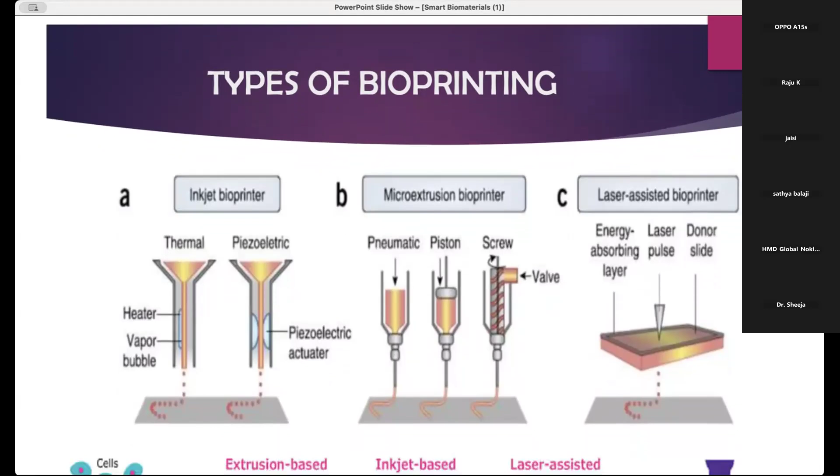This slide also shows the different mechanisms of extrusion-based bioprinting, inkjet-based bioprinting, and laser-assisted bioprinting, where in the first part, the cells could be associated with polymers and a cross-linker molecule, which can act as a bioink, and it is injected into the tube through an actuator, with either pneumatic, piston or screw mechanism, or a piezoelectric actuator or heater. Then there is the energy-absorbing layer hit by the laser pulse.

From the donor slide, the droplets could be assembled as a scaffold, which could be used for in vitro disease models or for various tissue engineering applications in regenerative medicine. A polymer-based bioink could also be preferred, and the choice of the bioink and the cross-linker molecule is purely based on the application.

So this figure actually gives an idea about the various stages of the bioprinting process. Under continuous process of the bioprinting, there are different stages A, B, C, D, and E. In the first figure, rectangular shaped bioprinting has been done. Then the second figure, zigzag patterned. Then third figure, circular shape. Then the fourth figure, D, random shaped bioprinting is taking place.

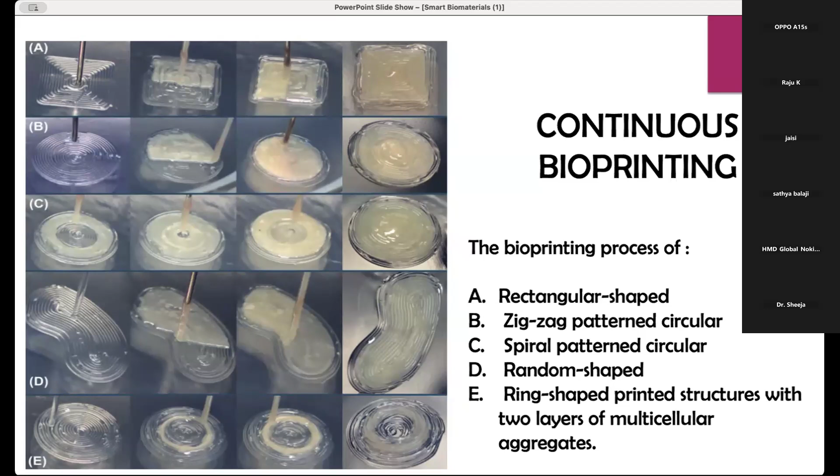And E, the last figure, is a ring-shaped printed structure where the 2 layers of multicellular aggregates could be visibly shown in the figure. So bioprinting is a very important technique for skin replacement or for organ implants.

Now 4D bioprinting with the smart biomaterials. 4D bioprinting extends 3D bioprinting by incorporating time-dependent shape transformation into the printed constructs. This fourth dimension, time, is activated through environmental stimuli like pH, temperature, moisture, magnetic field, or light.

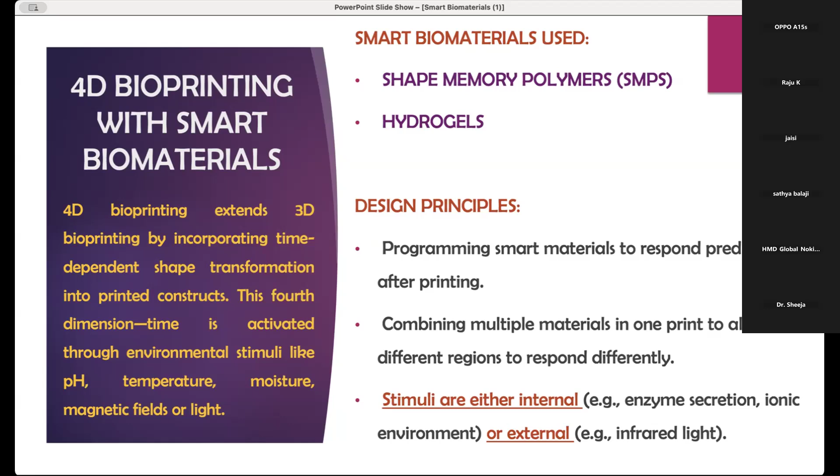Then the stimuli are either internal or external. If it is internal, then it is enzyme secretion or the presence of an ionic environment. If it is an external stimulus, then one such example is infrared light.

So this figure shows the effectiveness from 3D bioprinting to 4D bioprinting. The first figure is the earlier one we discussed, inkjet bioprinting. Then 3D bioprinting has been incorporated with the cell encapsulated scaffold used to achieve the particular model, and it is activated by various stimuli like physical, chemical, and biological stimuli, with temperature, magnetic field, electric field, and light. Coming to the chemical stimuli, these scaffolds are responsive to pH.

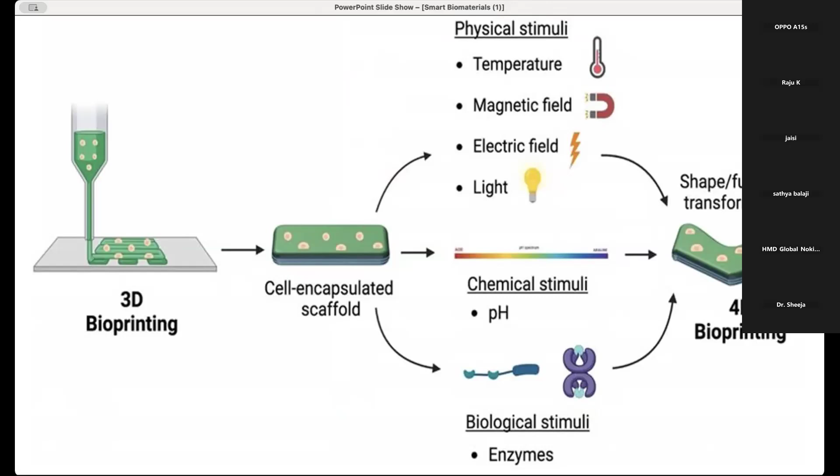Then they might have been studied for the enzymatic reaction. And finally, we can achieve 4D bioprinting for the required scaffold.

Applications of 3D, 4D bioprinting methods. Tissue engineering, dynamic scaffolds as shown in the figure. They can evolve like real tissue. Drug delivery, time-controlled release in specific locations for chronic treatment. Implants like self-unfolding stents or catheters that adjust after insertion. And finally they could be used for soft bioactuators, like bioactivated movement in response to environmental changes, which is a recent advance of smart biomaterials by 4D printing technology.

Chaotic printing with smart biomaterials. Chaotic printing introduces complex nonlinear mixing patterns during extrusion. It exploits chaotic flow dynamics to achieve a high-resolution spatial distribution of multiple components, for example, cells, polymers, and biomolecules. The materials and tools to be used: shear thinning bioinks, multi-material cartridges, computational modeling. Key advantages of this method: controlled heterogeneity, increased functional gradient, nozzle engineering for effective scaffolds.

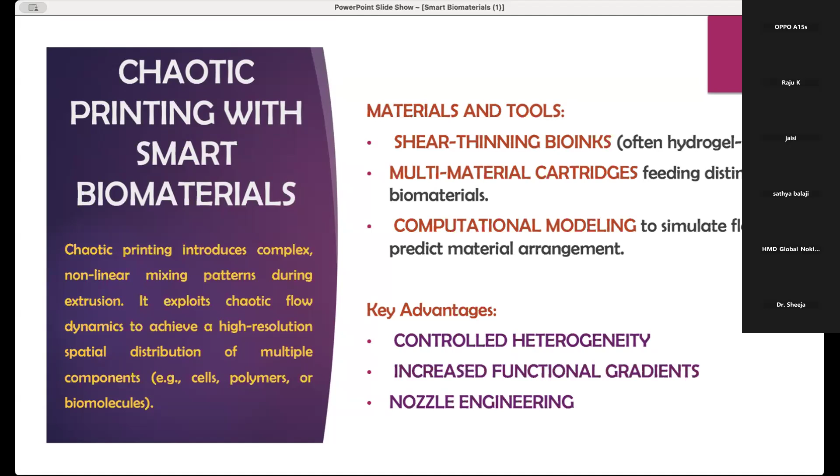Now, the recent advances in this type of biomaterial technique include smart biomaterial films. They are thin flexible films composed of smart biomaterials that can sense, respond, or adapt to their environment. These films are typically used as coatings, barriers, or functional surfaces.

The fabrication techniques include spin coating, layer by layer assembly, solvent casting, electrospraying, or inkjet printing. To be effective, the functional components include antimicrobial peptides or nanoparticles to prevent infection, extracellular matrix for biomimicry, and photosensitive groups to allow these smart materials a controlled response at a specific wavelength.

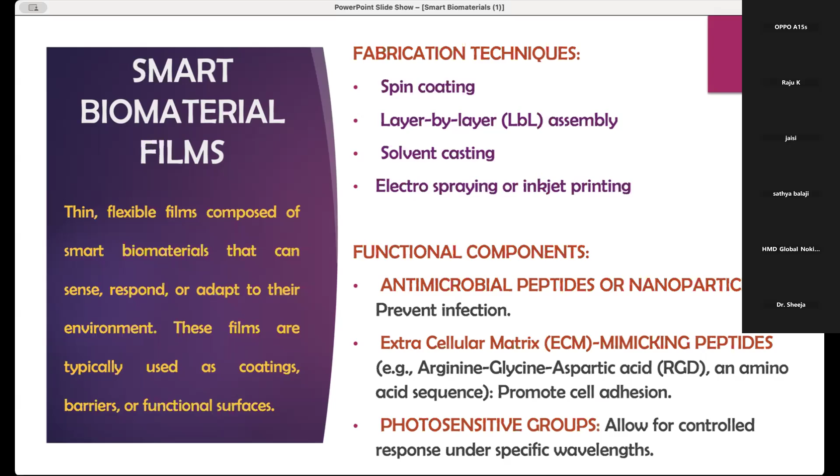The major applications of smart biomaterial films include wound healing dressings, because they release antimicrobials or drugs on contact with the external wound exudate. Flexible biosensors can detect biomarkers or physiological changes. Implant coatings reduce immune rejection and enhance biocompatibility. Then drug-eluting films for controlled dosage and timing.

What are the challenges of smart biomaterials? Ensuring that biomaterials are well tolerated by the body and don't trigger an adverse immune response is very crucial. Many biomaterials degrade over time, which can affect their performance and lead to complications. Developing materials with a predictable and controlled degradation rate is a key challenge in this advanced technique.

Replicating the intricate structure and function of natural tissues in vitro remains a significant hurdle. Producing biomaterials on a large scale and at a reasonable cost is essential for widespread clinical use, which is a highly challenging one. Future direction.

To develop patient-specific biomaterials for targeted therapy, apply 3D bioprinting to create complex, customized scaffolds for regenerative medicine and for drug delivery, use bio-based, biodegradable materials to promote sustainability in the healthcare sector, design multifunctional materials for drug delivery, imaging and therapy, and create hybrid biomaterials with integrated electronics for advanced biosensing, treatment, and diagnostic devices.